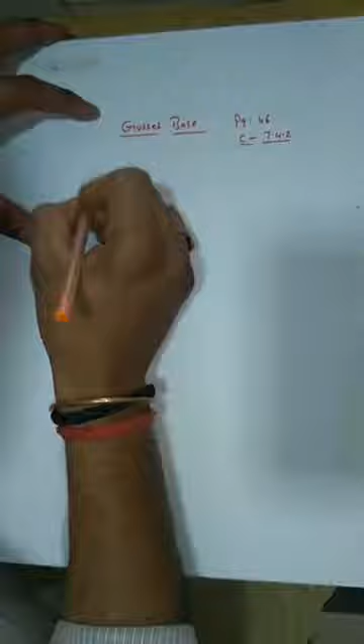Gusset base. After having the diagram, we can have a discussion on the gusset base, how to design the gusset bases. Let me draw the column, which is connected to the slab base.

See, even in gusset bases there will be a slab base. Why? Because we use gusset bases when the load is heavy, when the axial load is more. Axial load P is more.

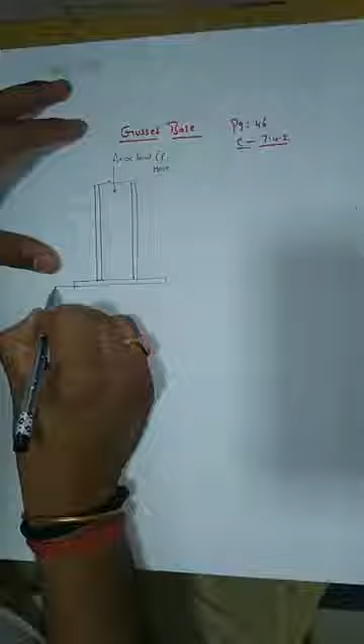This is going to be connected with the foundation, right? Concrete foundation, with the help of 4 anchorage bolts at 4 corners of the gusset base.

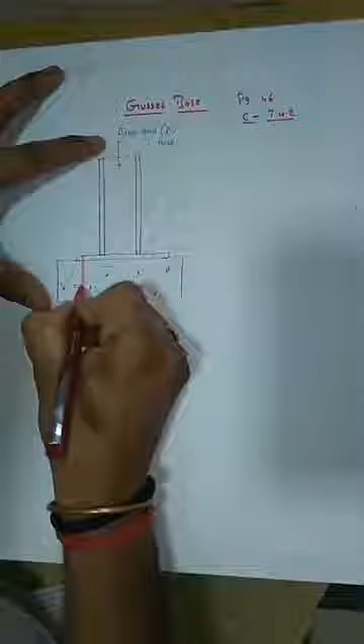Apart from a regular slab base, your gusset base will have one plate connected here to carry or transfer load safely to the slab base.

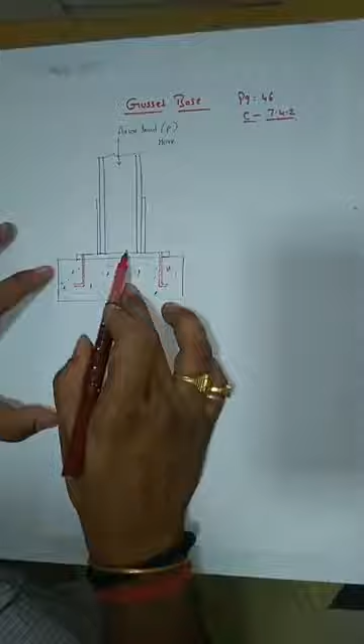When a column is carrying a heavy load, you can see in PEB structures (pre-engineered building structures), the bottom portion of the section is bigger in size. So to transfer this maximum load to the concrete foundation, the base of the column is supposed to be stiffened with the help of more plates.

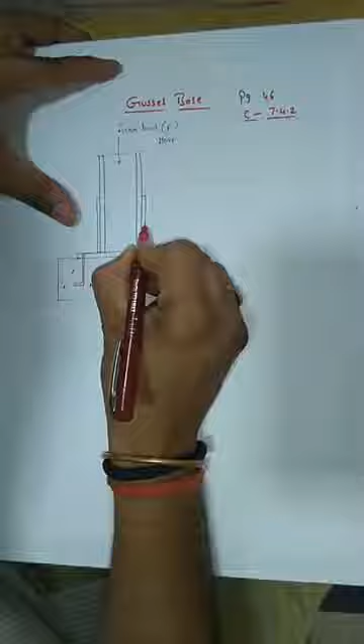So those plates are called gusset bases or gusset plates. There is one angle placed like this, so this angle is called gusset angle.

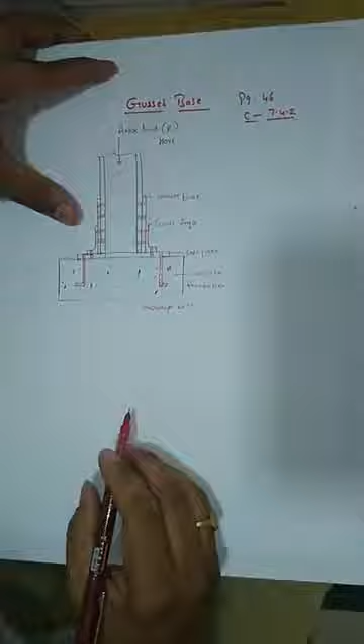Bolts will be placed here like this. Clear? So this is called gusset base, this is called gusset angle, this is called base plate, this is called concrete foundation, and these are called anchorage bolts. So this is how the gusset plate and gusset angle are provided.

So let me draw the top view where you can see very clearly how the gusset plates are provided. Here is the plate.

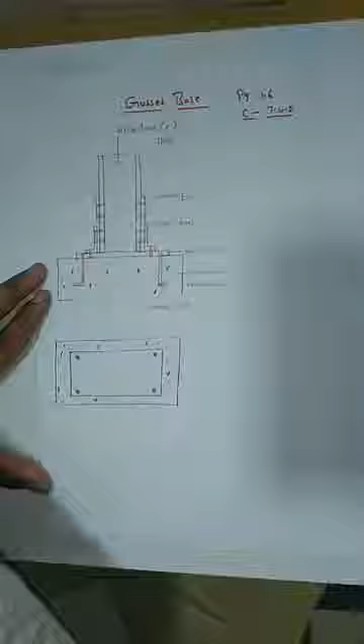This portion will be completely concrete, and there will be 4 bolts placed at the corners, which are called anchorage bolts. At the center there will be a column section, which was like this, and beside this column flange there is a plate, isn't it?

That plate is called the gusset plate, which is provided throughout the length of the slab base. Whatever length it is, that much width we provide, with a certain height, right?

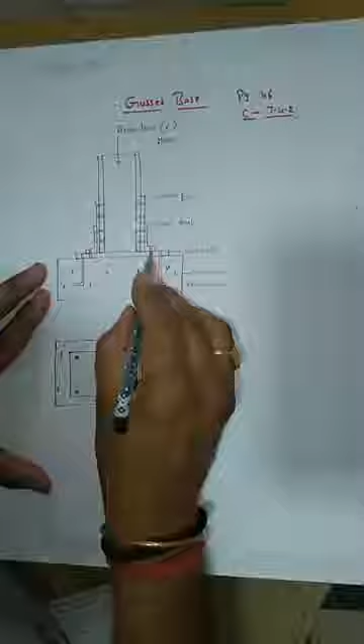So let me show you how these are connected. Here if you see from the top, bolts are visible. So these are the bolts.

This leg which is the outstanding leg is going to connect to the base plate. It connects to the base plate like this.

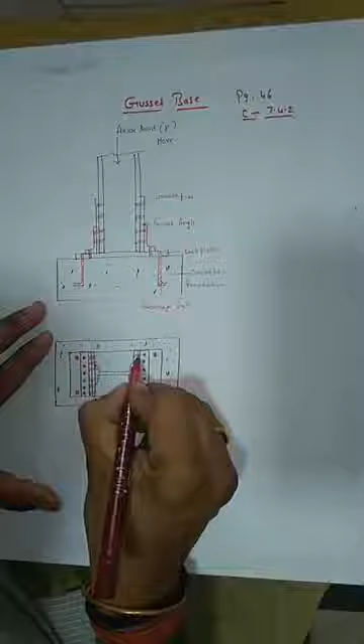Clear, right? So here you can see a concrete foundation, base plate, angle, gusset plate, gusset plate, column. So all these are placed here. This is elevation and this is the top view.

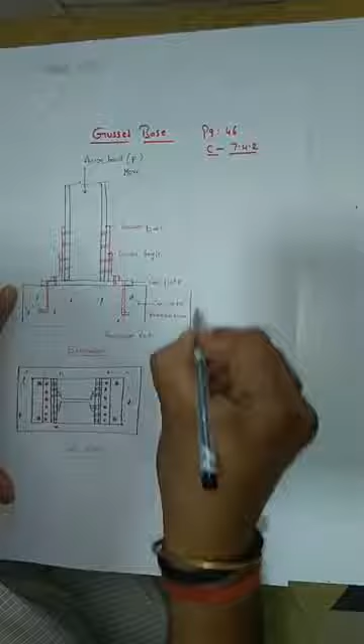Let me draw the cross section to show how it looks like. A cross section will have a concrete foundation, the base plate, and at the center you will have a column.

The web you can't see, it is invisible, that's why it is shown in a dotted line. From the side view you can see the gusset plate which covers the whole width of the slab base, like this.

On top it will be like this, and coming to the bottom it comes and covers like this. So this is the practical picture. This plate from the side view looks like this.

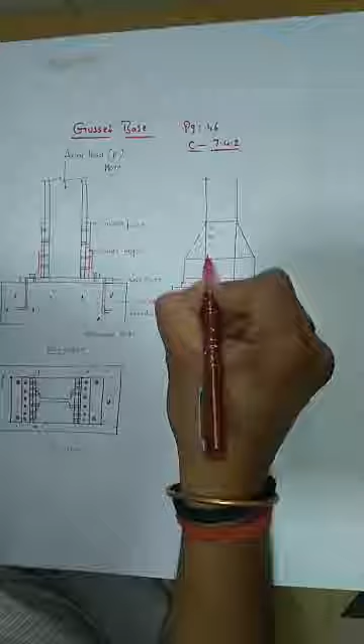Now this gusset plate and the column flange are connected with the help of bolts, and this angle leg and gusset plate are connected with the help of bolts. And this gusset angle leg connected with the base plate will be like this. This base plate is connected to the concrete foundation like this.

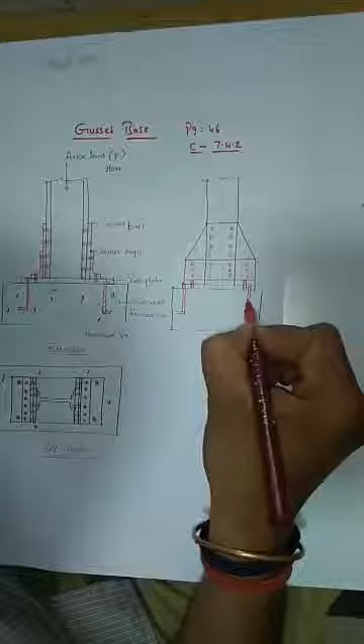As a civil engineer you must be in a position to draw every section, so that people can understand easily.

If needed I will hash the base plate too. You can see this is the base plate. When the load is heavy, just the base plate is not enough to transfer load to the concrete foundation. You need additional plates along with the base plate - these are the gusset base, gusset plates, and gusset angle. This is how the gusset base is shown, and this is the side view.

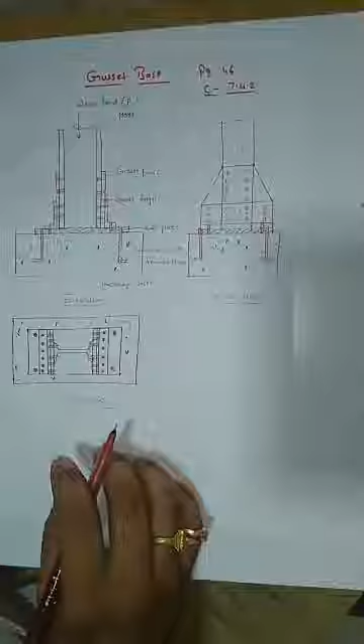Let me start with the design steps, how to design this gusset base.

As per IS 800/2007, you can find information about the gusset bases on page number 46, clause 7.4.2. From there you can understand these gusset bases.

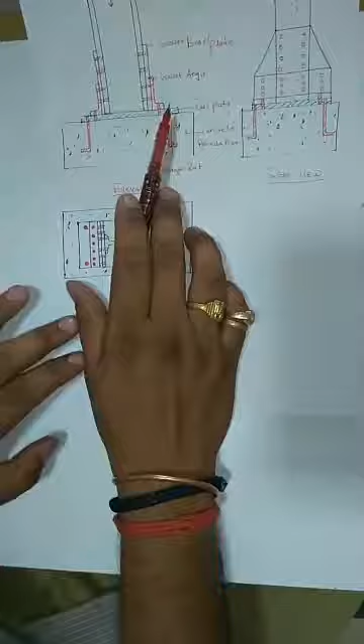As per IS 800/2007, the code specifies that gusset plates, base plate, gusset base and angles, and fasteners in combination with the bearing area shall be sufficient to take the loads - whatever the axial load which is carried by the column. All the bearing surfaces shall be machined to ensure perfect contact.

Now let me show you the picture of this, how the gusset bases look like. This is the model. Now I am showing the elevation.

See the elevation - column, slab base, connected to the concrete foundation with the help of anchorage bolts. There are 4 anchorage bolts on 4 corners. This is the elevation.

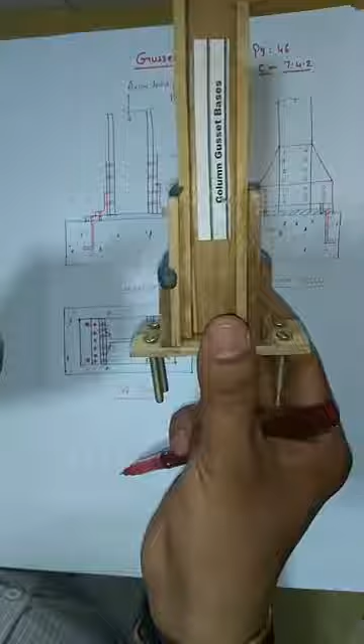Here I have shown two views. If the gusset base or gusset plates are connected with the help of bolts, it looks this way. This is the side view - your gusset plate is connected to the column flange with the help of bolts, and your gusset angle is connected to the gusset plate with the help of bolts.

If welding is done instead, this is the way welding is done - they do welding here, and on top of this they do welding here also. That's how your slab and column are connected to gusset bases, and these gusset bases are connected to the slab base, where the load will transfer through anchorage bolts to the concrete foundation. That is how your column bases are shown.

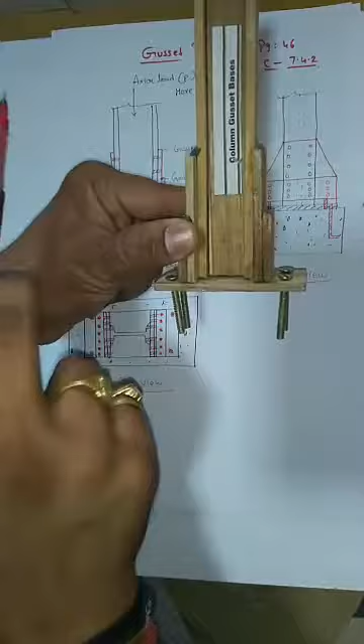Now let me start designing the gusset base. In designing the gusset base, first you have to design the slab base, because the slab base is the common element in both the gusset base and slab base design. In both cases, slab base is a must. I think you already know how to design the slab base.

First you have to find the size of the slab base by calculating the bearing strength of the concrete, then calculate the gross area of the base plate required. After calculating the gross area, you decide the size of the base plate by taking the projections A and B, which should be almost equal to make it economical. Then you have to decide the thickness of the base plate.

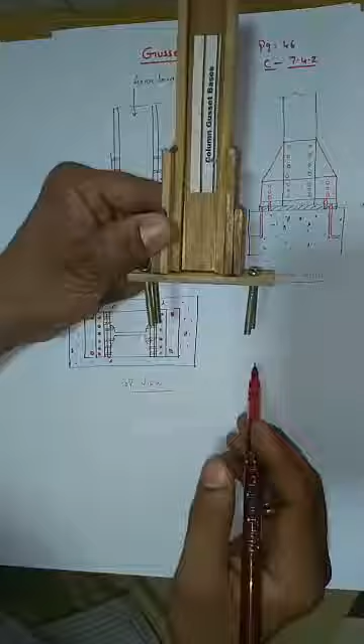The code recommends the formula from page number 47 in IS 800/2007, clause 7.4.3. The thickness of the slab base from this formula should always be greater than the thickness of the column flange. That is how the designing of the slab base ends.

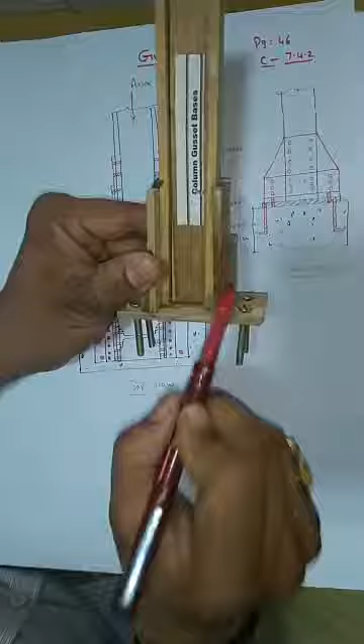Additional to the slab base, you have to design the thickness of the gusset plate, width of the gusset plate, and height of the gusset plate. You have to design the length of the gusset plate, width, thickness, and next decide the size of the gusset angle. This you have to design based on the design steps.

Now I will let you know the design steps one by one, how to design the gusset base. Let me write the design steps on a new page.

Now start with the design of gusset base or gusset plate. So what is the first step? First you have to design the slab base, since slab base is a common element in both slab base and gusset base.

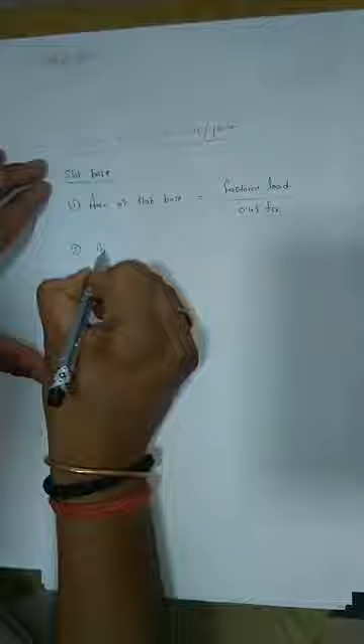For the slab base, first you have to calculate the area of the slab base from the factored axial load acting on the column, towards its bearing strength of the concrete foundation based on the concrete grade. Next you calculate the thickness of the slab base. That ends with the size and completes the slab base design.

Now coming to the gusset base, let's see what the code is recommending. Let's write the steps one by one. First, the thickness of the gusset plate you can assume as 16 mm.

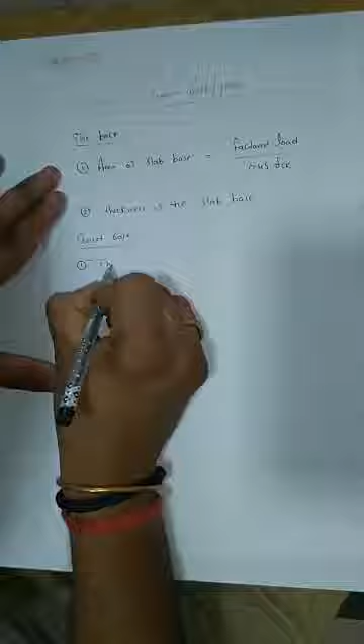Thickness of the gusset plate is assumed as 16 mm. Undoubtedly you can assume the gusset plate thickness as 16 mm straight away, and you can check later whether this 16 mm thickness is safe or not.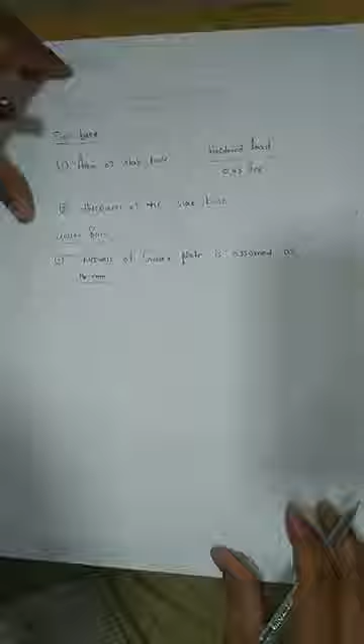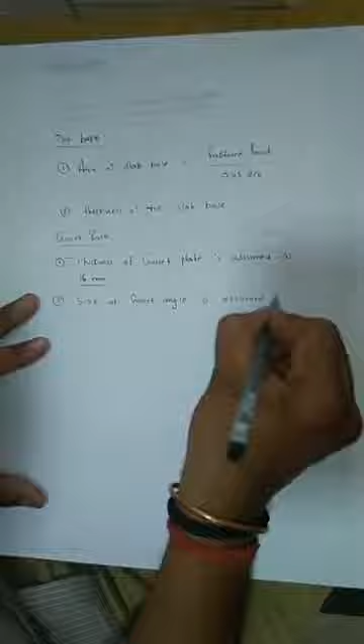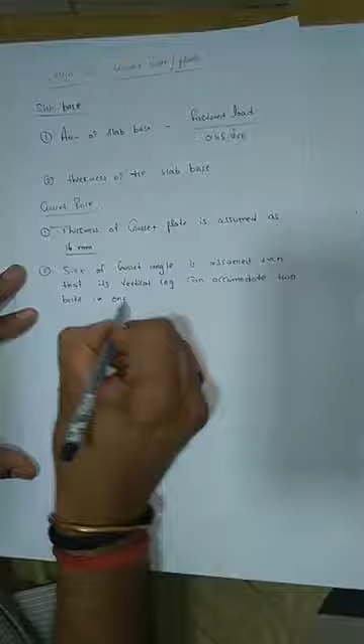Next step: the size of the gusset angle. Whatever size of gusset angle you are going to take, code is recommending that it is assumed such that its vertical leg can accommodate 2 bolts in one vertical line, whereas the other leg can accommodate 1 bolt.

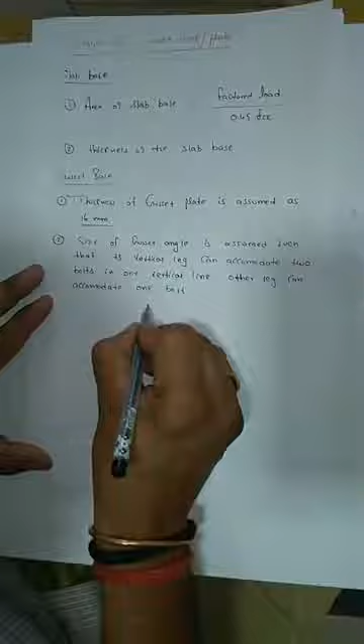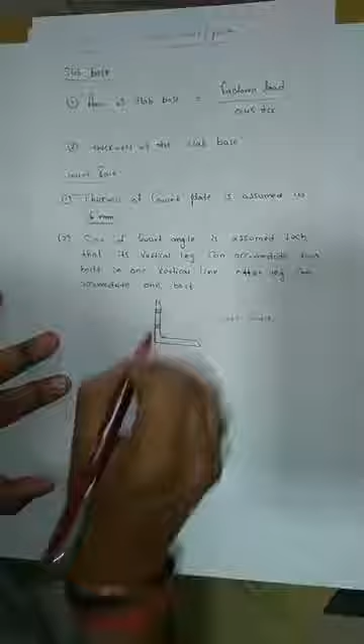Let me show you with a diagram. Whatever gusset angle I am providing along with the gusset plate, this angle is to be assumed such that — this is your gusset angle. Code recommends the vertical leg should accommodate 2 bolts in one vertical row, and 1 bolt horizontally in the other leg.

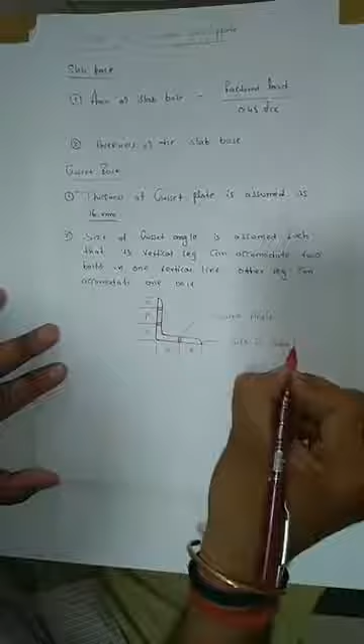By that, what should be the length of the connected leg? It should be edge distance, pitch distance, edge distance, edge distance, edge distance. This is how you can fix the size of the gusset angle. Whatever thickness you take, it can be equal to the gusset plate thickness. So whatever thickness I assumed for the gusset plate as 16 mm, you can take even the gusset angle thickness as 16 mm — that is what code is recommending.

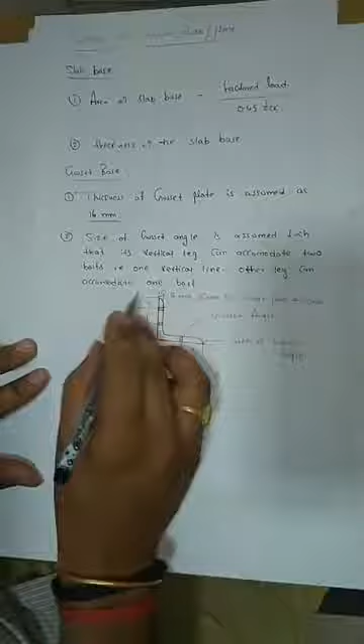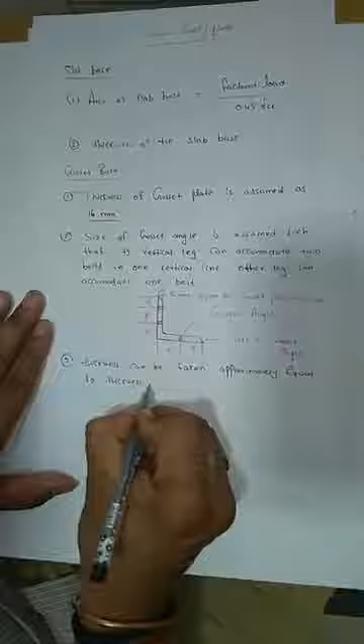Next, as I told you, the third point: thickness of the gusset angle can be taken approximately equal to the thickness of the gusset plate directly. That is how you can select the size of your gusset angle.

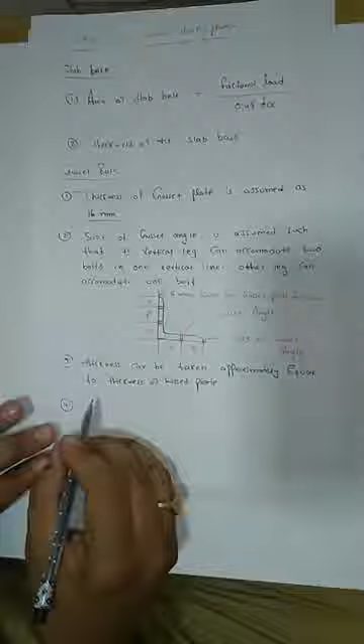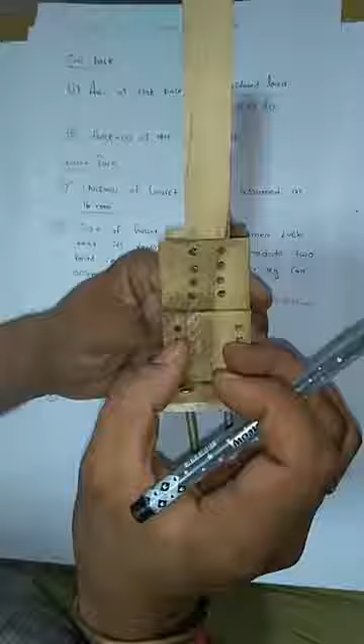Next, width of the gusset base. What should be the width of the gusset base? It is kept such that it will just project outside the gusset angle. Hence your gusset angle may not be equal to the width of the gusset base. So whatever angle you are providing, this angle need not be equal to the width of the gusset base — the gusset base or plate can have more width, but the angle can have less width.

This is the width of the column flange, and this is the width of the gusset plate, which can be equivalent to the width of the slab base. But this gusset angle need not be equal to the width of the gusset plate — it can be smaller. That is the condition the code is recommending.

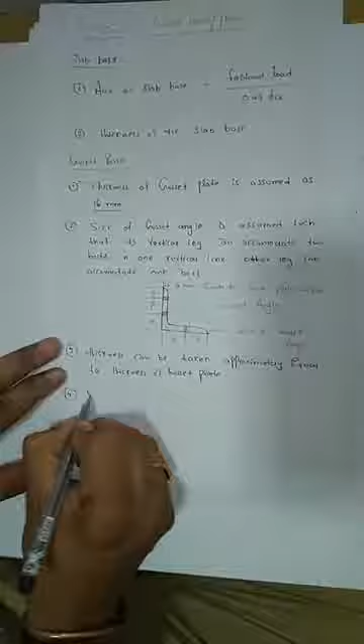Width of the gusset base is kept such that it will just project outside the gusset angle. The gusset base or gusset plate's width can be more than the gusset angle's width.

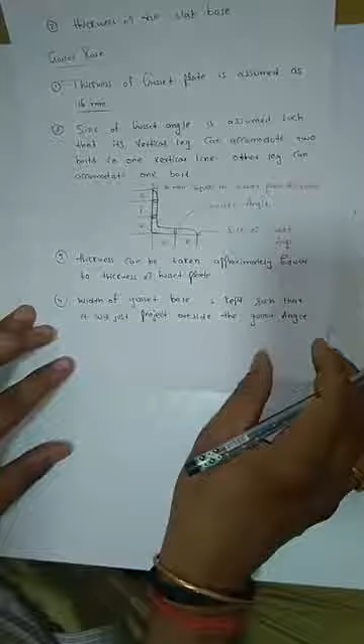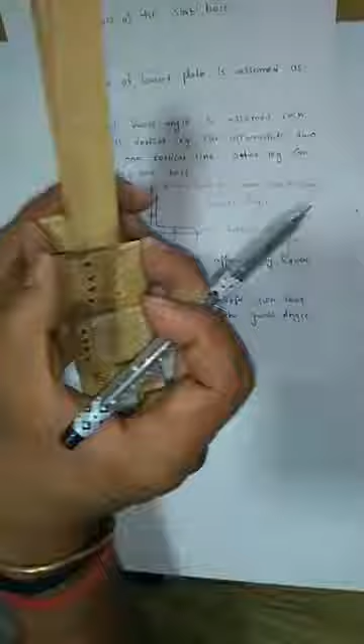Then how to calculate the length of the gusset? Length is equal to area of plate divided by width of the gusset base. The length of the gusset plate you get from the area of the plate. Area of the plate is calculated based on the load and the width of the plate. The width of the gusset base can be taken as the width of the slab base. You know the width, you know the area — by that you can calculate the length of the gusset base straight away.

Now sir, how to get the area of the plate? The area of the plate always comes from the load. So what load you need to consider?

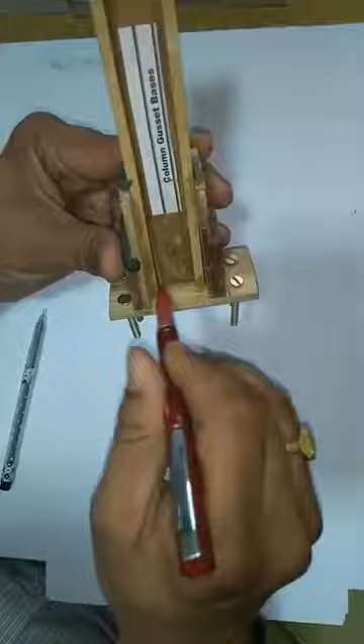As I already told you many times, when the column is connected to the slab base where the end is properly milled, the column will carry 50% of the load through its bearing with a proper contact between column and the base plate, and the other 50% of the load will be taken by the gusset bases. So only these additional plates are going to be designed for 50% of the axial load, no need to take 100%, because through bearing 50% of the load will be smoothly carried by the gusset bases and the slab base.

So the next important point is that it is only based on the load, when the end of the column is machined. What do you mean machined? Machined and milled are the same. When the end of the column is properly machined or milled, for complete bearing on the base plate.

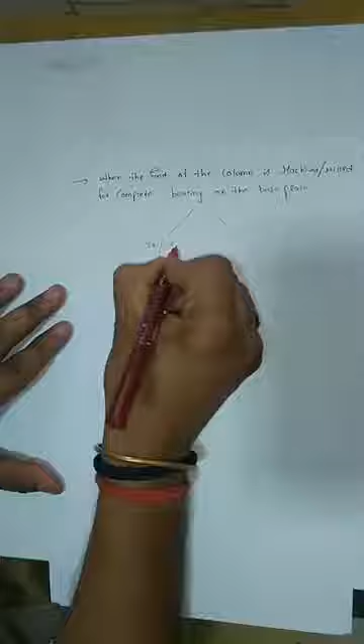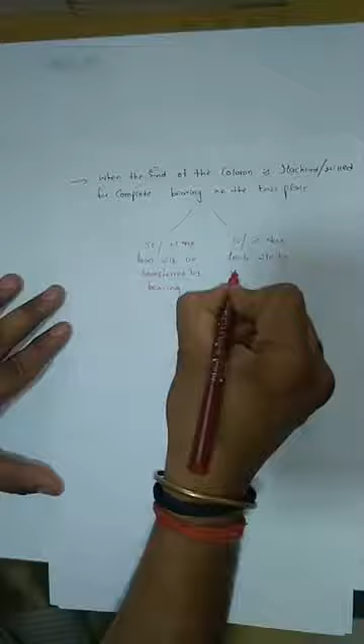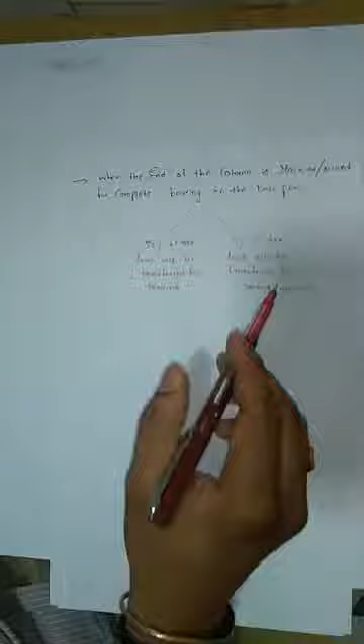50% of the load will be transferred by bearing, and 50% of the load will be transferred by bolting or welding. So when the bases are properly milled, 50% of the load will be transferred by bearing by having proper contact, and 50% will be transferred by bolting or riveting.

So if you want to calculate the number of bolts required to connect your gusset base to the column, take 50% of the load and calculate the strength of one bolt in terms of shear. Why shear? Because your bolt is subjected to shear under this force. By that calculate the strength of bolt under shear, and you know the load carried by the gusset base, which is 50%. Total load divided by strength of one bolt will give you the number of bolts required to connect your gusset plate to the column flange. That is how you calculate it.

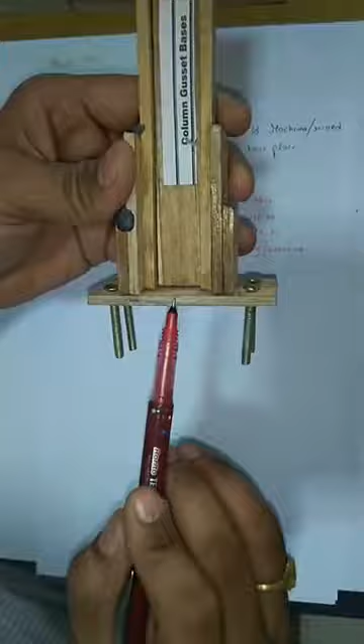So then the thickness of the base plate is computed by flexural strength at the critical sections. You can calculate the thickness based on the flexural strength at the critical sections, because your slab base is something like a short beam, and a beam is basically subjected to flexure, bending. So you can calculate the thickness either by using the formula, where T should be greater than TF, or else you can calculate the thickness based on the flexural strength at the critical sections. You can calculate the critical section and the flexural strength, and through that you can calculate the thickness also.

There are two ways to calculate the thickness. In my problem I told the students to calculate thickness based on the formula, and in the other way you can also calculate it based on the flexural strength at the critical sections. This is how the designing of the gusset base takes place. So in slab bases you have to decide the size of the base plate and the thickness. In the gusset bases you have to design the slab base along with the size of the gusset base.

For the size of the gusset base, you should know the length, width, and thickness. The gusset angle code has given it very clearly: while using a gusset angle, the vertical leg should accommodate 2 bolts and the horizontal leg should accommodate 1 bolt. By that you can get the size of the gusset angle easily. For the width, you can take the width of the gusset angle almost equal to the width of the slab base, no issue in that. The thickness of the gusset angle can be taken equal to the thickness of the gusset plate or gusset base. That's it, this is the designing of the column bases.

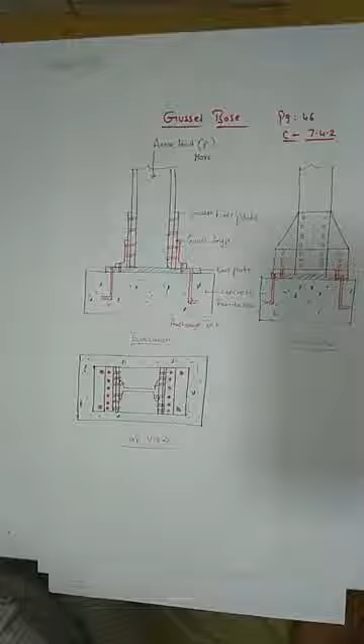So very important: you can come across at least one question out of these two in your competitive exams, either IES or external examinations. That's why I told you compression members is such an important topic, where you come across different kinds of designs like compound column design, strut design, built up columns like laced and battened columns, splicing, and column bases with slab base and gusset base. Almost you will do around 6 to 7 problems, but you will get 2 problems in your external examinations.

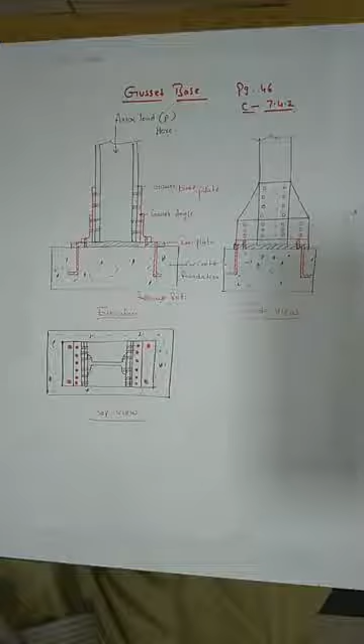So we can't just imagine what's going to come, you have to go through each and every concept clearly to have a better understanding of designing compression members. Okay, so this ends the designing of the compression members.

Tomorrow we are going to start with the beam concept - beams. We will discuss different types of beams like laterally supported beam and laterally unsupported beam. We will design one problem on beams which is a built-up beam, and one problem on a hot rolled beam. We'll cover how to design beams under flexure, shear, buckling, crippling and all, and we will go through plate girder design.

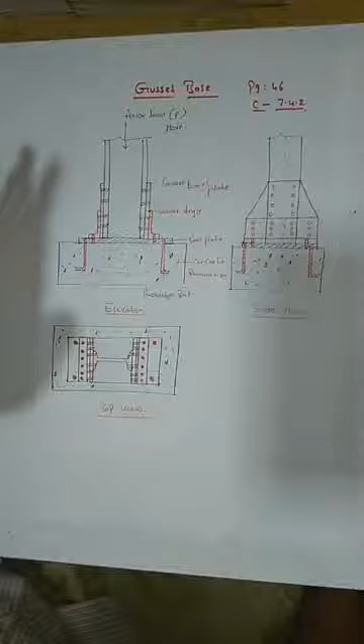And one more important concept - eccentric bolted connections. We have 2 eccentric bolted connections and 2 eccentric welded connections, almost 4 problems total. Out of those 4, one question will definitely be there in your exam, so it's an important topic. For every problem I have a model, and I will explain through the model. We'll start that immediately after completing beams.

Then we can move on to roof trusses. That's it, so that ends today's class. I will share the notes immediately after the session completes.

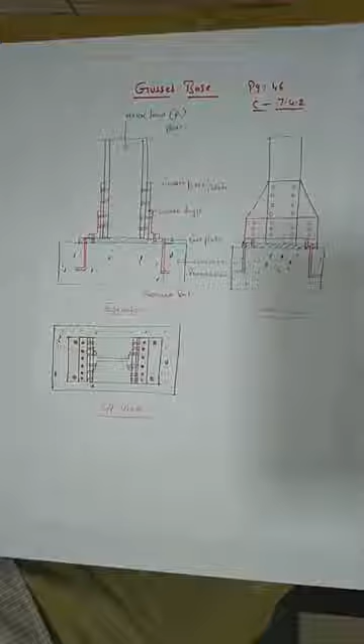Let's see, tomorrow either beams or we can start with eccentric bolted or welded connections. I will share through Facebook which topic I am going to start tomorrow. I will start based on convenience - either eccentric connections or beams. I think it's better that after completion of beams only we can start eccentric connections, because you should know the beam concept first to understand eccentric connections - how the load transfers from beam to column. So that's why we will start beams tomorrow, then we can go with eccentric connections.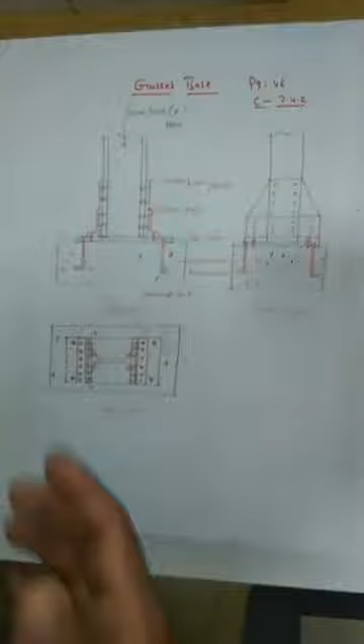Applications for gusset base - all columns in major industrial buildings, when the column is subjected to heavy loads, we will go with gusset bases only. Almost all. Only for small loads, like electrical poles - if you see electrical poles, all of them are connected to the concrete foundation with only a base plate. There is no gusset base for that. But if you see huge hoardings, on a single pillar there are big hoardings.

So you can see that pillar, either it may be a circular pillar, a circular hollow pillar, or a rectangular or square pillar. That pillar is connected to the base plate with the help of some plates on its circumference - those plates are called gusset plates. You can see this. So wherever a column is subjected to heavy load, they will go for gusset bases. Okay, simple.

More load - wherever the load is low, for small loads, a slab base is enough to transfer load from column to foundation. You don't require any gusset bases or gusset angles to transfer the load. Anything else?

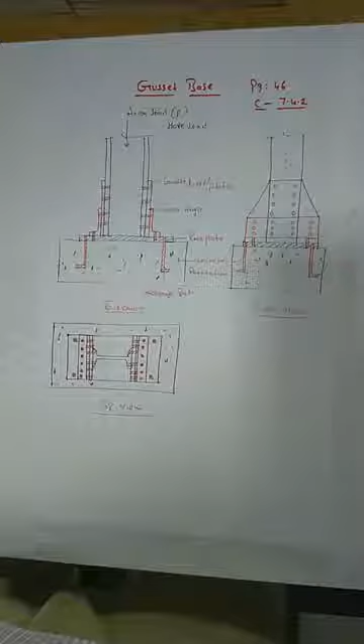Praveen asks, why should we use packing plates in connections? See, packing plates are required whenever there is a gap between two plates. In such situations you require some filler plates to be placed. When the sections are unequal, when the parent materials are unequal, if you want to butt each other, then you require a packing plate. Packing plate applications are very rare - whenever there are unequal plates or unequal sections to be joined to each other, filler plates are supposed to be needed. The only thing is, filler plates are not subjected to any kind of load.

Keep that one point in mind - never will filler plates be subjected to any load. Filler plate is only provided to fill the gap between these non-uniform sections. It is only to fill the gap, that is the reason it's called a filler plate. In column bases we never use filler plates.

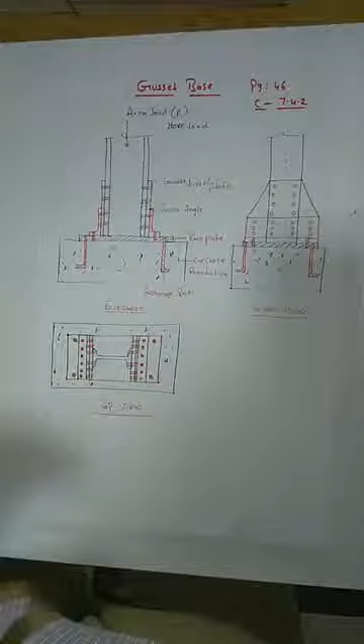We don't use filler plates there. So if somewhere we require filler plates - if your slab base is not properly contacted to the concrete foundation, and there is some gap below the slab base, that gap is going to be filled with some plates, and they do welding between the slab base and that filler plate.

That's where filler plates are used in column bases, otherwise no need. Okay, so let me show you the diagram of what gaps mean.

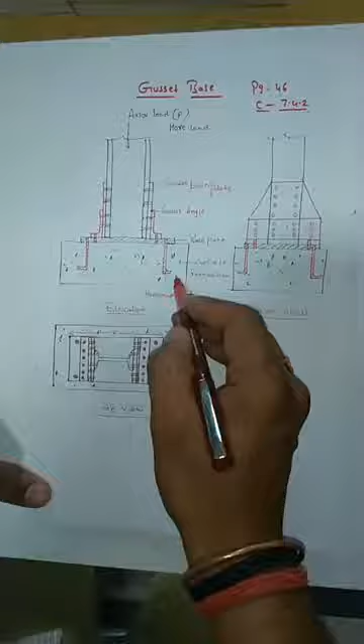The only thing is, if you find any gap in between these two, that gap can be filled with some steel plates which are placed and welded. That's how they do the welding. And you know, this anchorage bolt's point is very important, amma.

I forgot to tell you that - very, very important. Let me write here, since it's very important - anchorage bolt. I forgot to tell you, amma, sorry. There's a concept about anchorage bolts.

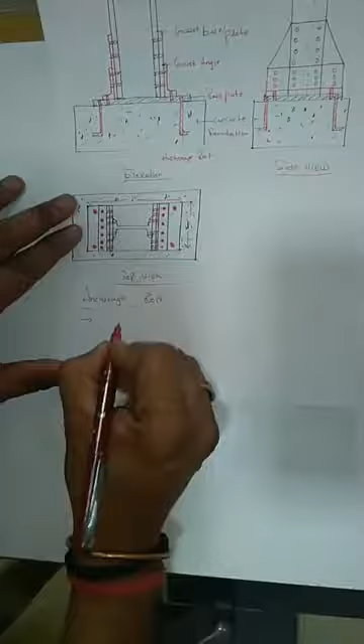Whatever anchorage bolts you are using, they should have a minimum dia of 20 mm and should be 300 mm long. Clear? Anchor bolt should have a minimum dia of 20 mm and the length should be 300 mm long.

This length should be 300 mm long and it should be anchored like this. It should never be straight - it should be bent and anchored, anchored into the concrete.

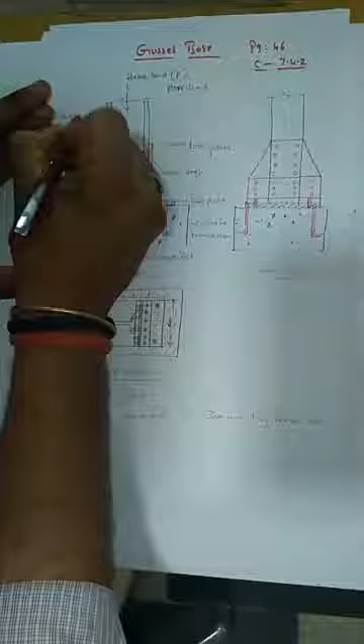If it's not, what happens - see, when your column is subjected to lateral force, your column will try to deflect laterally. When it deflects like this, if you have proper anchorage, this anchorage will keep your column stable. Otherwise, the chances of deflection are much higher.

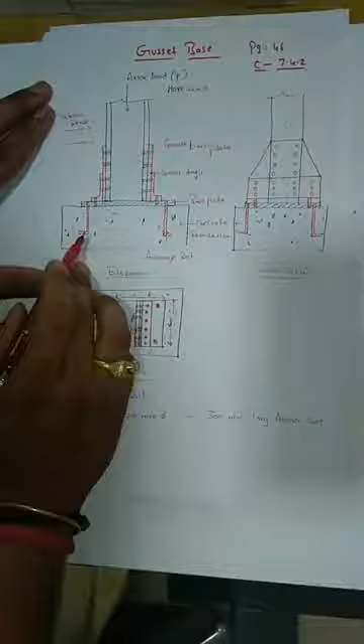Otherwise, what happens when it's subjected to lateral force - this bolt will come out. That's why anchoring is very important; that's the reason it's called anchorage bolt. So as an important specification, the anchorage bolt should be 300 mm long, minimum 20 mm dia.

And what I called the cleat angles - whatever cleat angles you use, the bolt connecting is to be used for connecting column to the base plate. Cleat angles can be a minimum size of 2 angles, 65 by 65 by 6 mm thick. The cleat angle size should be minimum 65 by 65 by 6 mm.

And if weld is to be used for connecting column to the base plate, you have to go with the fillet weld only. Fillet weld is to be used to connect slab base to column. Clear? These are very, very important points.

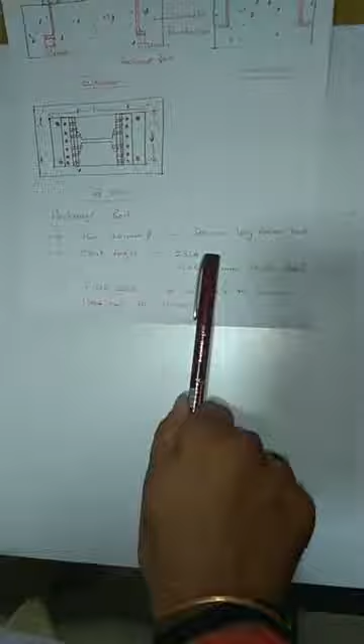So please keep them in mind. Anchorage bolts: minimum 20 mm dia, length 300 mm. Cleat angles should be minimum size of 65 by 65 by 6 mm. Fillet weld is to be used to connect slab base to the column. Okay, so that's it - that ends today's topic.

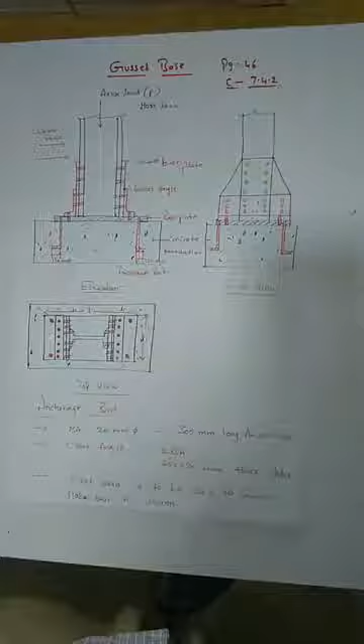Okay, Praveen, thank you for staying till the end. Rajita ma'am, thank you so much. And who else? Shravya is also online. Thank you Shravya. Any doubts? Clear? So today's session is good.

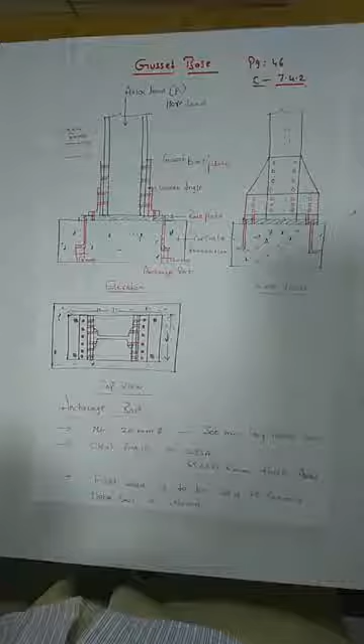Ma'am, shall I leave? Anusha, are you fine? Have you understood the concept? I think you already covered these topics in my class. Okay, yeah, thank you Praveen, thank you Shravya. Let's see you tomorrow then. Okay, bye amma.